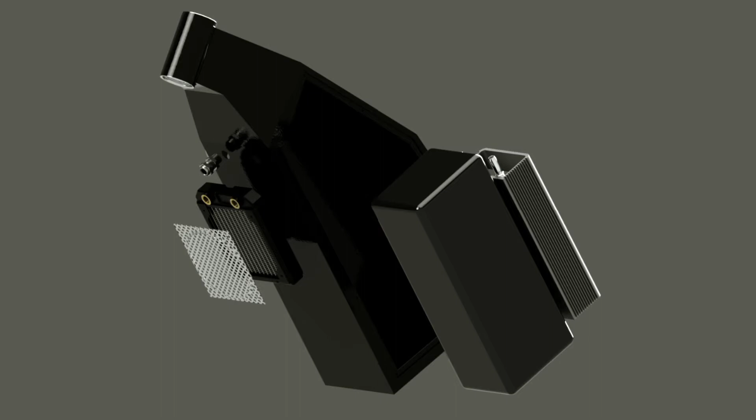I've been thinking about this for a while, and then I discovered this free modeling software and started working on it. Been just playing around with it, an hour here, an hour there for like the last week or so, just tinkering with it, learning, trying to figure this all out. This is just a rendered preview of it though. Let me get over here and show you guys what we actually have going on.

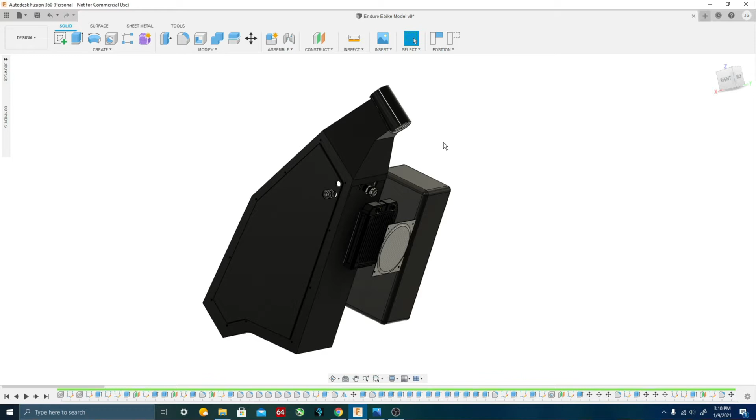Of course, I wasn't able to find a model of my bike frame, so I had to do that myself. I think it came out pretty alright for an idiot like me that doesn't know what they're doing with it. Autodesk Fusion 360. If you're new to this, this is definitely the one to go for. I tried Blender, and the user interface just doesn't seem as friendly to a newbie.

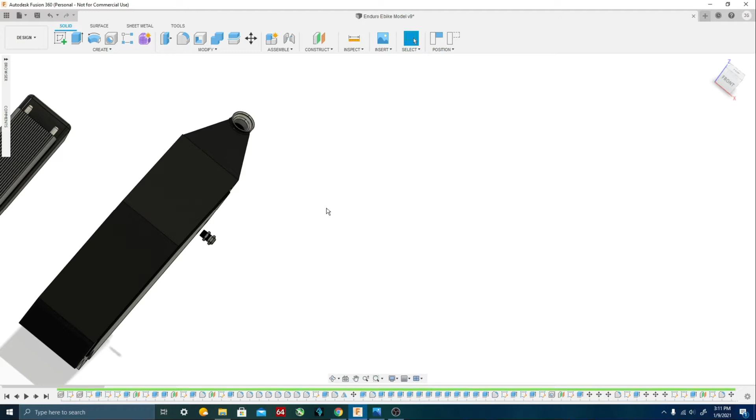Anyway, what we got going on here, this is the Sabvoton controller, with the extruded aluminum heatsink housing that they come with. But what I did here, you can see I found a water block, and surprisingly it's sized perfectly. I couldn't have asked for a better sized block. It's lapped flat, all that good stuff. Just waiting for it to come in now.

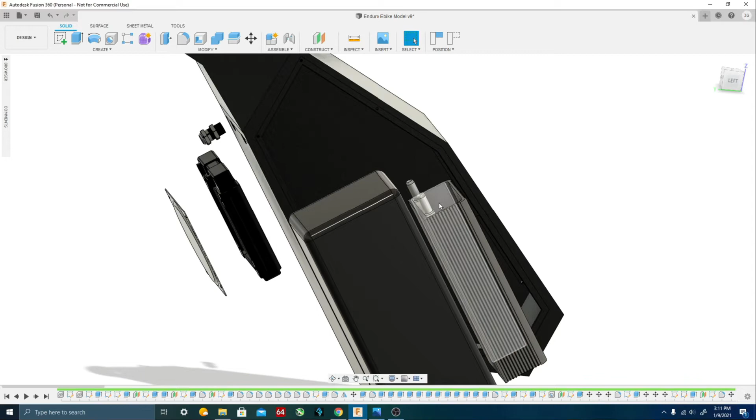This is the battery, just a rough model of the battery. I might completely ditch the extruded housing here and just put this water block on the bottom of the PCB of the controller. And we'll run our tubes from that to this radiator. We're going to start off with 120 millimeter, to start with the minimum and work our way up from there, size-wise and price-wise. You can get these little 120 millimeter aluminum finned radiators for like 15-20 bucks off Amazon and eBay.

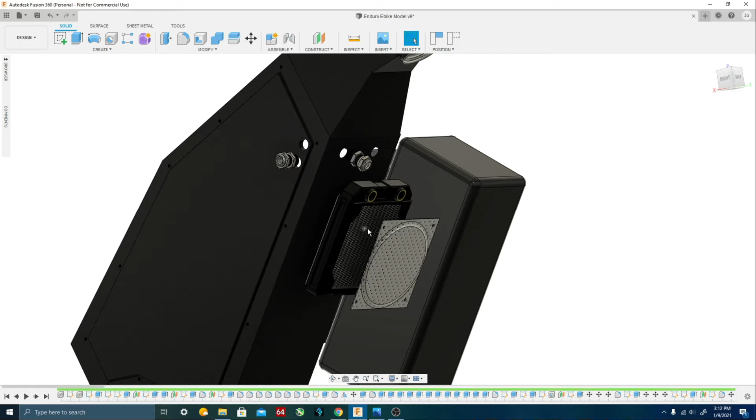I haven't decided yet if I'm gonna run the tubes straight out the bottom of the frame and loop them right in, or maybe run them out the side panel and come in from the side that way. I'm thinking it might not be ideal to have them here, but then over on the side, there's always the chance of them getting snagged on a random branch or something. You never know.

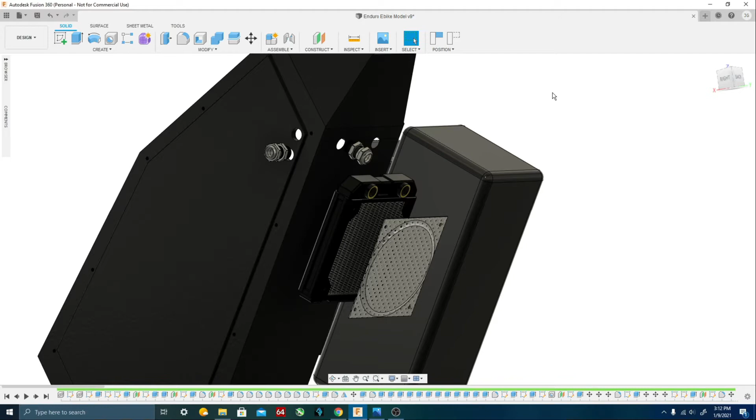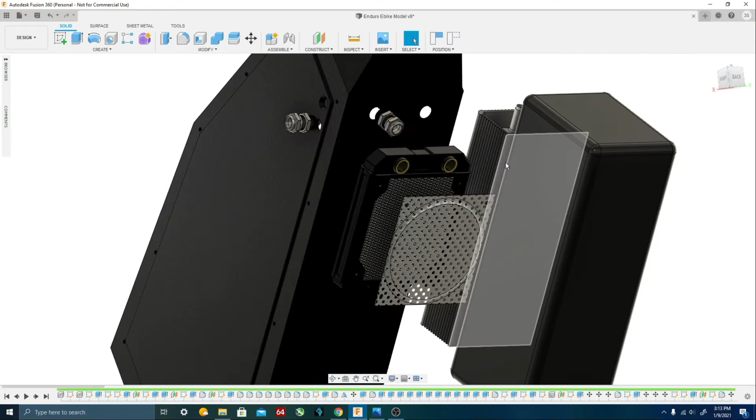So what I did was I picked up some G1/4 thread 90-degree swivel fittings, so they rotate 360 degrees freely. I'm hoping that'll make things a little bit easier, neater, tidier when it comes to actually setting up the tubing runs. Should be a pretty cool project once it all comes together.

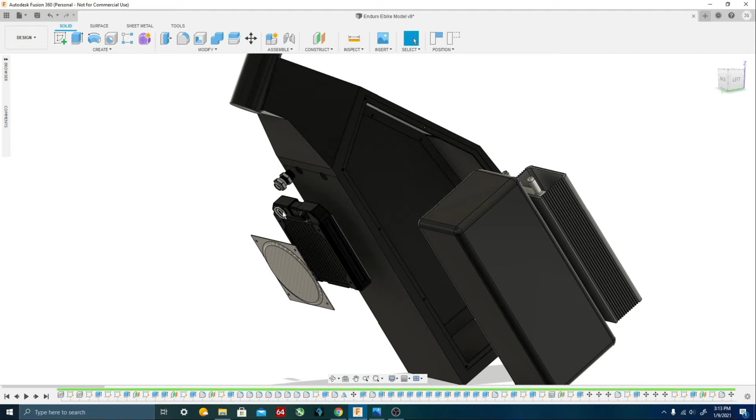A lot of people that I talk to about this are, with good reason, concerned about water and electronics being mixed together like that, but people have been water cooling computers for the longest time, and I know that's apples to oranges. Your computer's not getting smashed around and taken off jumps, but it's the same basic concept. And distilled water is non-conductive anyway. It's contaminants in the water that create that conductivity.

Or if you really wanted to, you could go as far as using mineral oil. But if that stuff starts leaking or you have a spill, man, have fun cleaning that up. I would not want to be that guy.

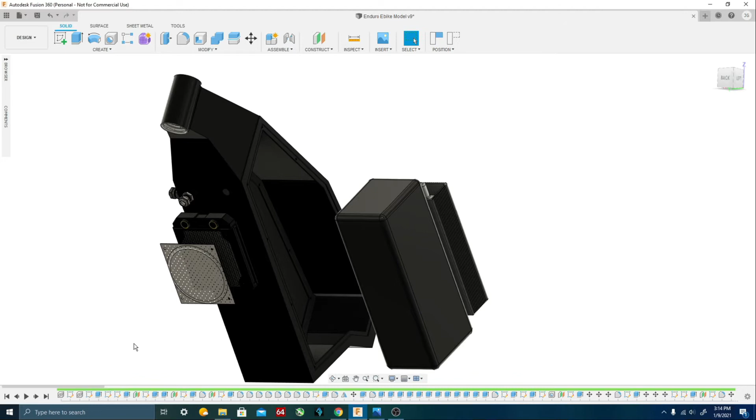But yeah, I'm not going to take my controller apart right now to show you guys what's inside it, because the water block probably won't be here for a good 2 weeks still, and I need the bike. It's my way of getting around. So we'll shoot over to YouTube quick. I'll show you what we have on the inside of the controller, so let's hop on over here.

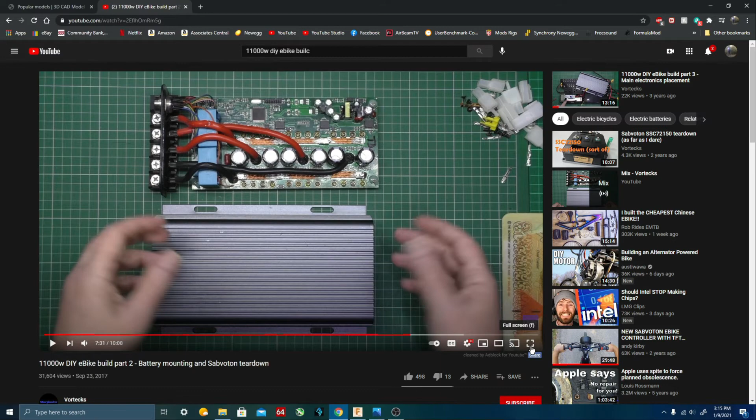That's got to be so much fun. Mine peaks at about 6,000, almost 7,000 watts, but it's rated for 5,000. I could only imagine almost double the power. That's sick. But anyway, here we go.

I always take everything apart because I like to see what's in them. Me too. Me too. As you can see. Right, so, here we go.

These controllers, they have this nice big chunk of aluminum on the bottom to act as your heat sink between it and the housing here. And underneath us here, this is all your MOSFETs. And then on the other side of the board, as you saw, you have your capacitors. And that's what's creating all that heat.

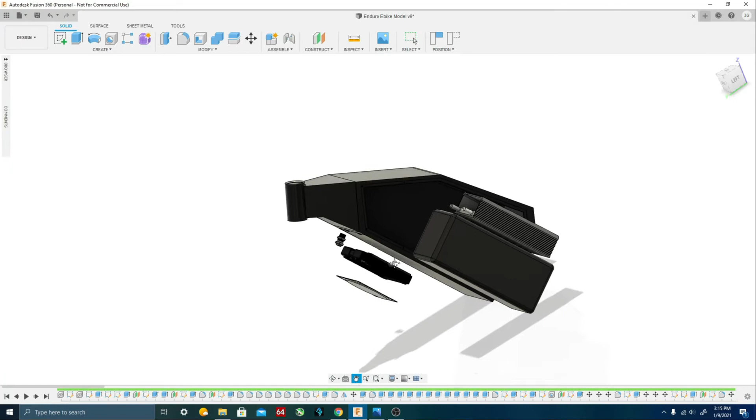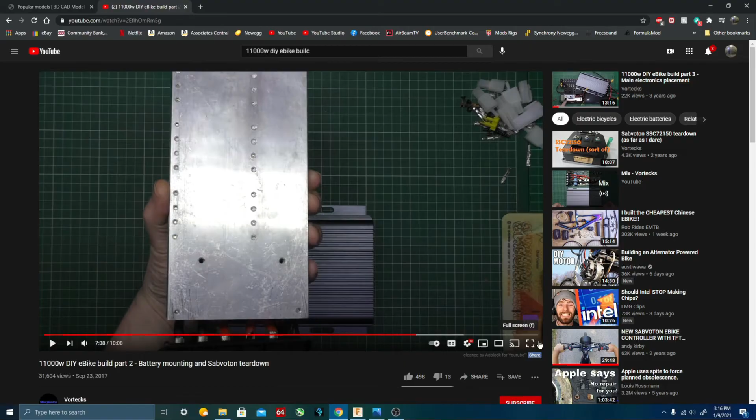I used to have the controller on the outside of the frame down here, but now it's on top of the battery inside the frame, so it gets toasty, to say the least. In the winter it's good for a little bit longer, but when you're riding hard in the summer, that baby gets toasty.

You can see that there's thermal compound down in all these holes here, and he explains that this whole thing was coated in thermal paste or some kind of thermal compound. He wasn't real specific about it, but we'll have to replace that after we disassemble it. I'm thinking maybe I'll pick up some generic thermal paste like you would use on a CPU or GPU die, or possibly a more permanent thermal epoxy, but I haven't quite decided on that yet. I still have to work some of those more minor details out.

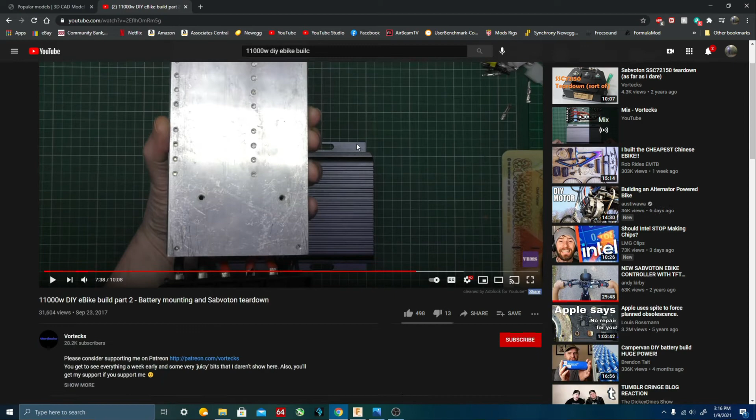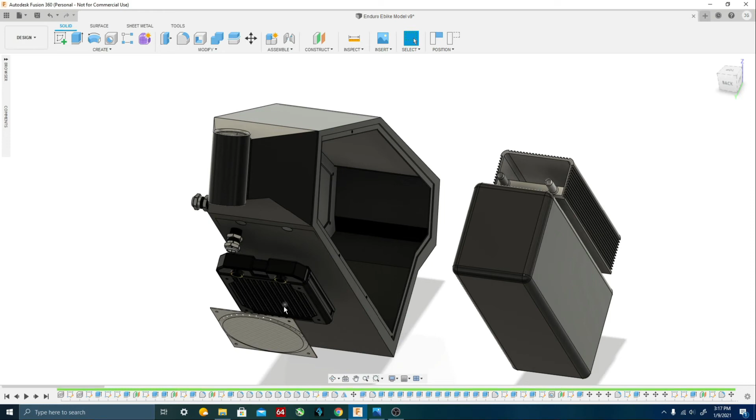But yeah, you get the general idea. A bloody great heat sink on the underside and all these FETs everywhere. And so I found that block, and it's perfectly sized to cover the whole board. Really, I only need to cover about 2/3 of it, but what the heck, might as well do the whole thing. It gets so warm inside that frame that if I could get this little 120 millimeter radiator on the outside of the bike, and even if it reduces my temperatures by 10-15 degrees, that's awesome. That's all I needed to do.

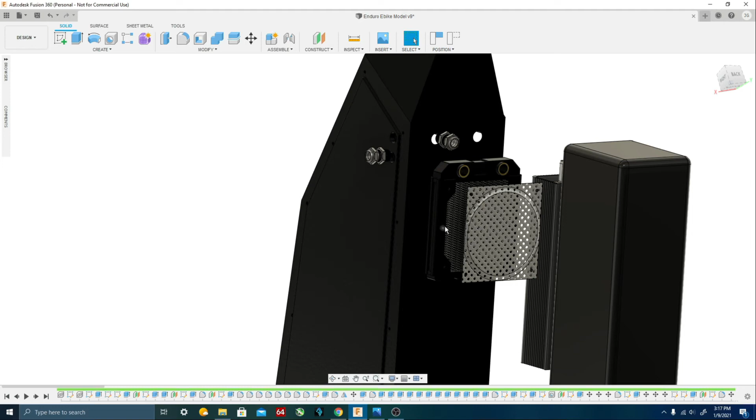And if this doesn't work out quite to our expectations, then we'll bump up to a 240 mil. Why not, right? You can get them cheap enough. I'm not going real expensive on this either. I'm buying a cheap aluminum finned radiator so that if anything does go wrong, if somehow a rock or a stick makes it through this grate and punctures it, then whatever, we're out 15 bucks instead of 60, 70 bucks.

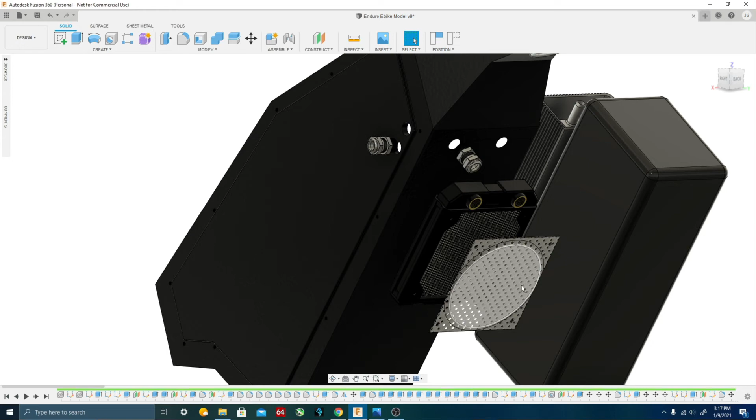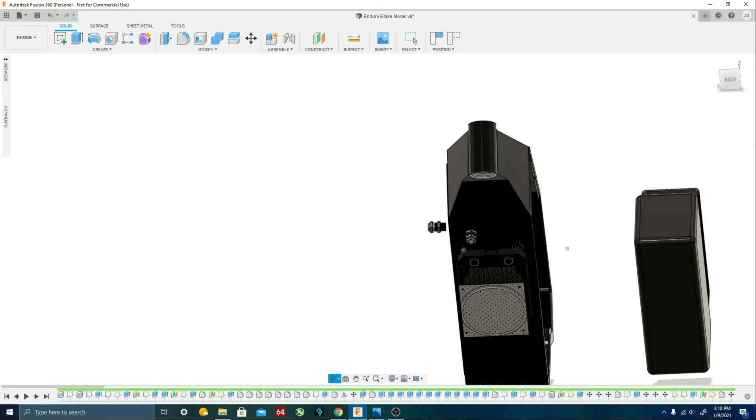I'm probably going to use these cable grommets, run the hose through that, and then cinch it down. Not enough to crush the tubing, but just enough to keep a nice watertight seal around it. Because the whole point of moving the controller inside the frame was to keep it out of the elements and keep it from getting damaged. So if we have holes where water can seep right in, especially from the bottom with all that kicking off the front wheel, then there's no point in doing any of this. Might as well just put the controller back on the outside.

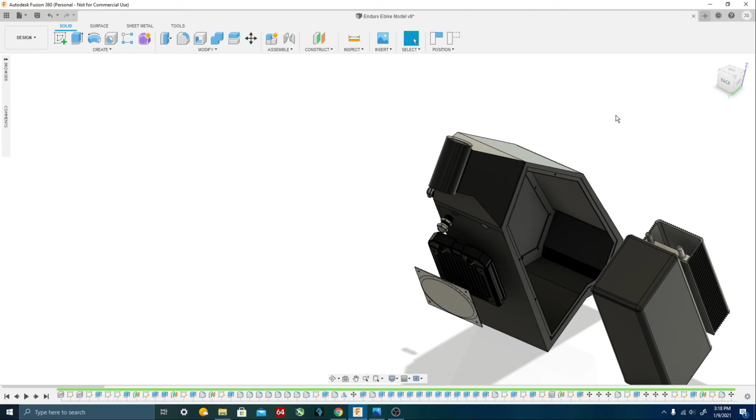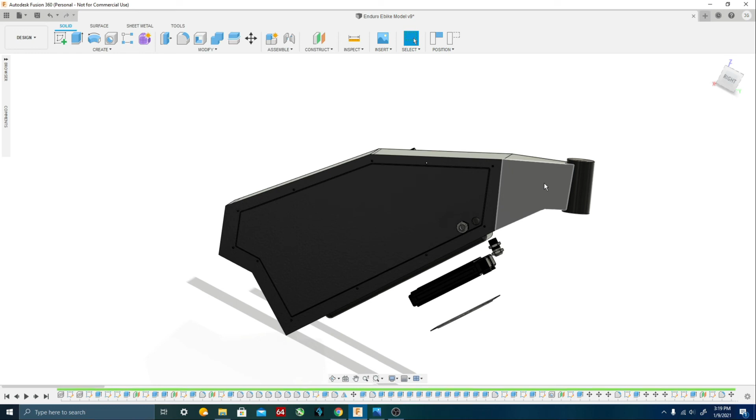I considered doing air-cooled, but again, there's the same problem. If I put fans in, something has to be sucking air in, and the other one has to be blowing it out. And the one that's sucking air in is just gonna suck any rain and dirt that comes near it and shoot it right inside your frame, all over the controller, your connections, your battery, whatever. So that's not even an option as far as I'm concerned.

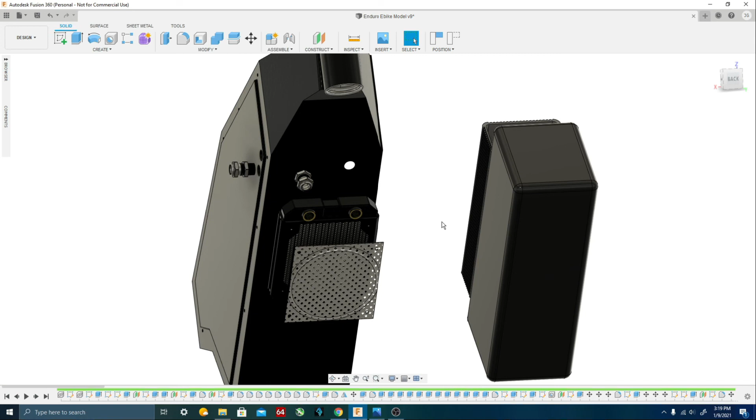But yeah, I just wanted to share this with you guys. Want to get your thoughts on it, what you would do, what you wouldn't do, what might look completely idiotic to you. I'm always looking to pick the brains of people more experienced than myself, so it'd be cool to get a little conversation started on this.

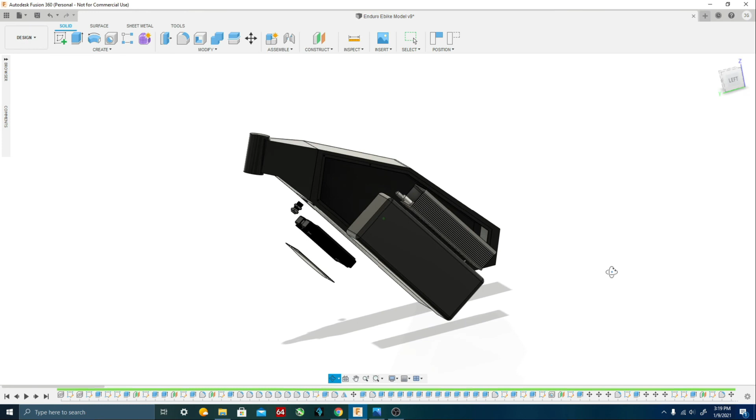Because looking online, I was able to find 1 or 2 articles from a couple of years back about people that tried doing this, and it seems like it just never took off. I don't know if it's just because it's such a niche thing. It's a niche thought for a niche item in a niche market. You know what I mean? So there's really not much to go off of.

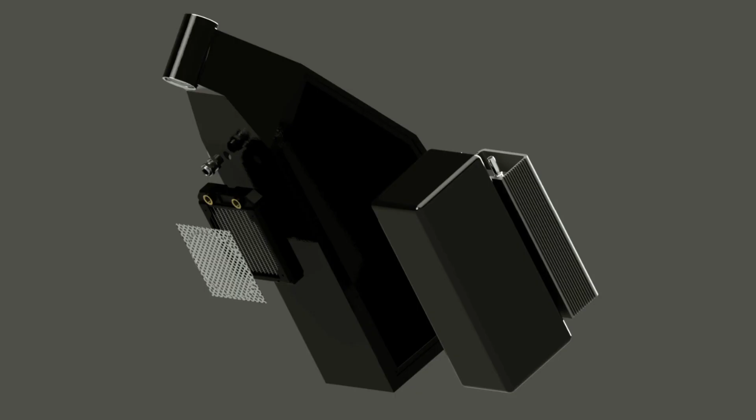What I'm planning to do is set up a rig. I'll build the loop, fill it with water, pressure test it. We're gonna have to be a little abusive and really stress test the hell out of this thing. And if it holds up, nothing cracks, nothing leaks, then it'll go in the bike. So, yeah, that about wraps this one up, guys.